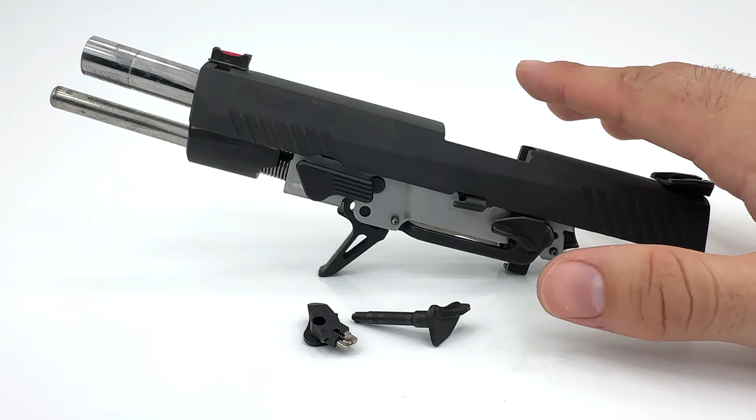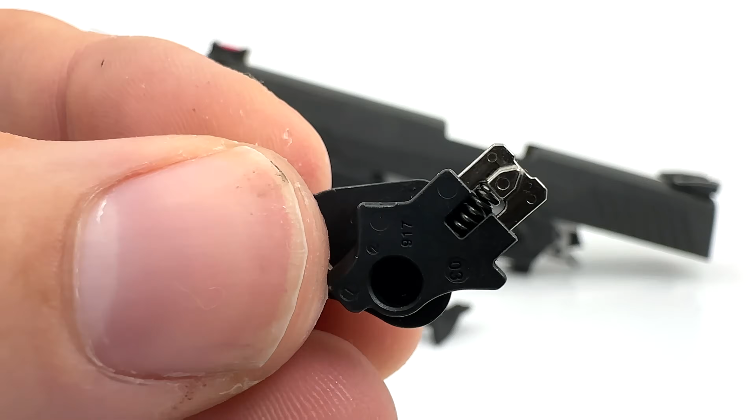I'm Edmund. This video is going to be a complete breakdown of how the P320 manual safety works. We'll discuss the parts involved, how those parts interact with the rest of the P320, as well as take a deeper look at what's actually preventing a discharge when the manual safety is in use. To make things easier to understand, I'll also use 3D modeling to illustrate some of the internal mechanics, and I'm also going to explore and explain a unique built-in feature of the P320 manual safety that isn't widely known or discussed, and it's not shown in any of Sig Sauer's marketing material. However, it's critical to how the P320 behaves if the manual safety is ever abused or otherwise forced into a failure state. Let's begin.

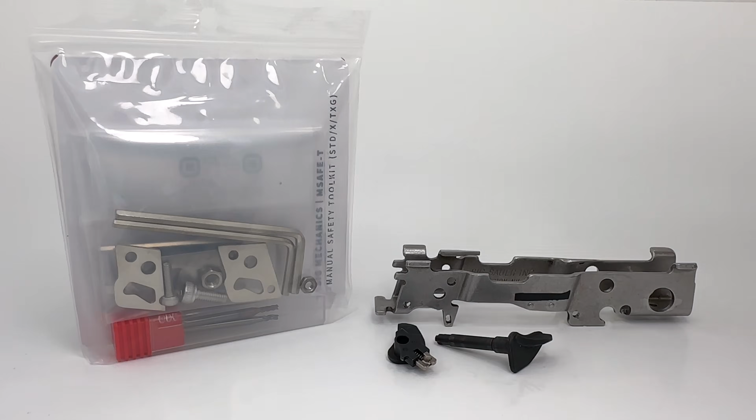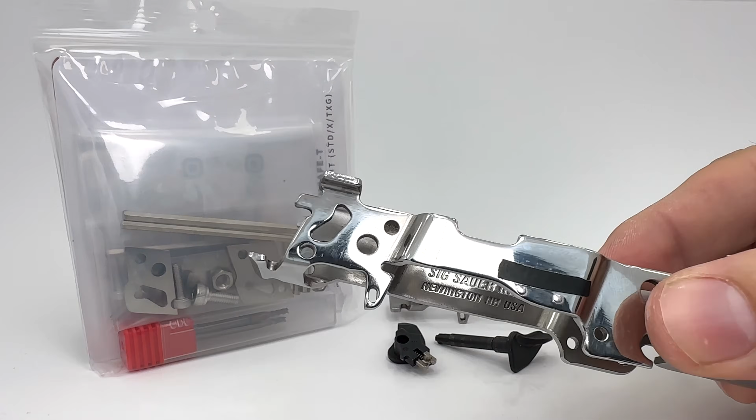Okay, so for those of you who subscribe to SIG Mechanics, you know that not too long ago I announced the MSAFE-T project for the P320. And for those of you who don't know what this is, it's a toolkit that lets you take any non-manual safety FCU and with the assistance of a few templated cuts, convert the FCU and the grip module into a manual safety model made to replicate the M17 or M18 models. And in doing so, it allows operators to modify the P320 further in order to meet their different operational preferences.

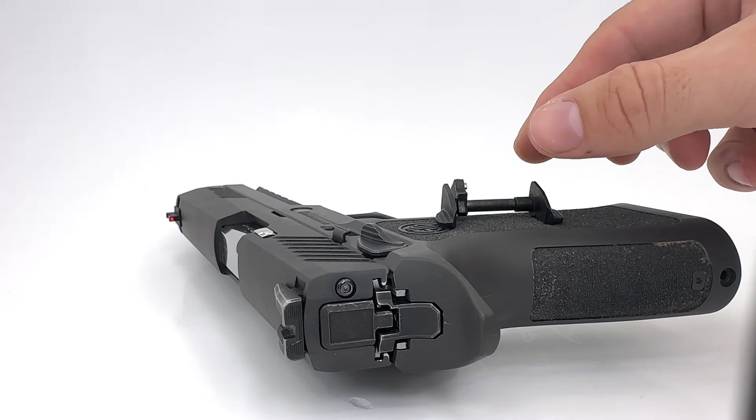Now, ever since I released that video, I had quite a few people ask me to make a video that shows you exactly how the P320 manual safety assembly works. And I think that has a lot to do with how the P320 manual safety doesn't operate to physically block the SEAR and instead prevents a trigger pull in a sort of indirect way.

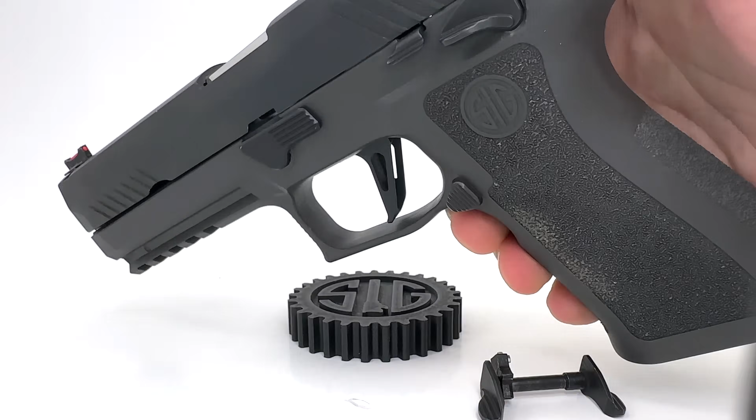And so here is the P320 fully built, and this one's using the X series grip, so yours might have the standard grip module. However, it's all the same thing. And as you know, to activate the safety, you lift the levers, and to deactivate, you drop them down, and that's the basic function. So let's open up the P320 and take a look at the FCU and see this function in normal operation.

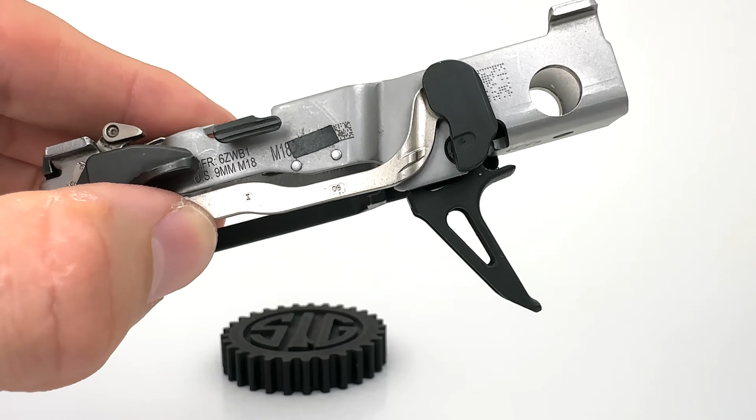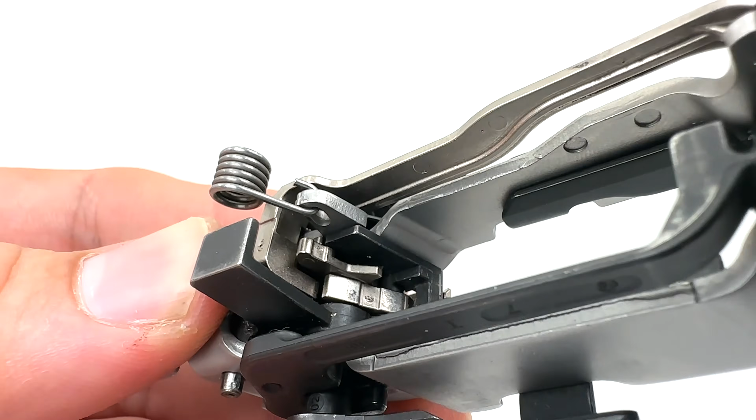Okay, so here is the FCU, and for those of you who are maybe newer to the P320 platform, the trigger is connected to the trigger bar. The trigger bar extends back and into the SEAR housing, and here you can see the trigger bar has a leg that extends back behind the SEAR. And now if I pull, the trigger bar will move forward until it engages the rear side of the SEAR, and as you continue to pull the trigger, the SEAR will continue to drop until the striker is released and the P320 can discharge.

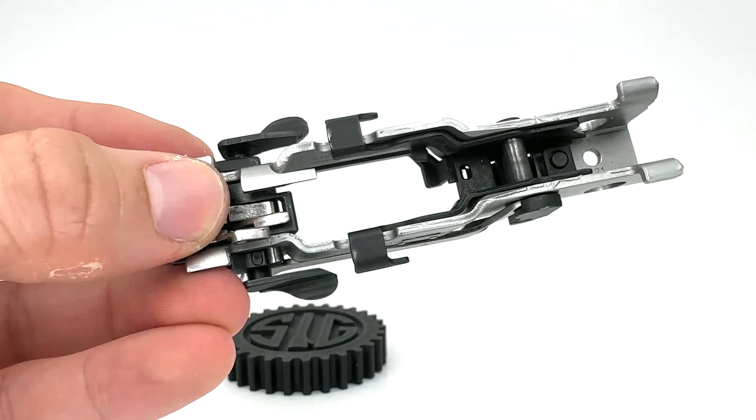Now, when you add a manual safety assembly, you're simply introducing 4 new components to the FCU. So here is a completely stripped FCU that only contains the components required to make the manual safety function. You might notice that even though the manual safety assembly is 4 components, this FCU has 5. That's because the SEAR pivot pin on the P320 actually plays 2 roles depending on if the manual safety is installed or not. I'll talk more about the SEAR pivot pin in a minute.

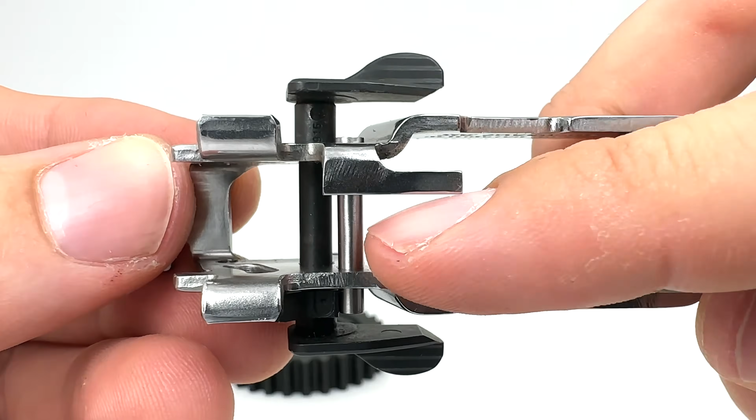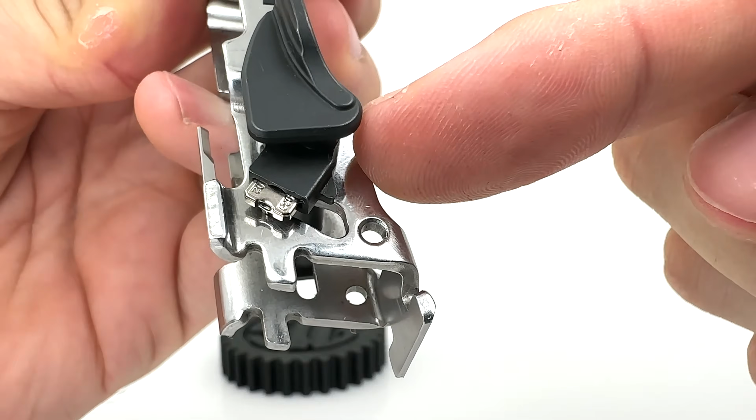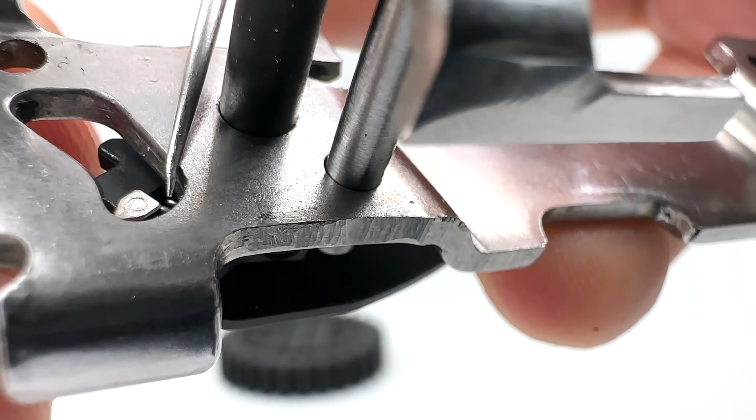But for now, when the FCU is stripped of all other parts, what's left is the left and right levers. As you can see, the right lever has a housing built into it, and in the housing is the detent, which is this small steel part right here. Behind this detent is a small spring that keeps the detent under constant spring tension. Now, if we flip the FCU and take a look at the detent from the inside, you can see the spring hiding behind the detent. But more importantly, you can also see that the detent has this chevron-shaped extrusion formed into it.

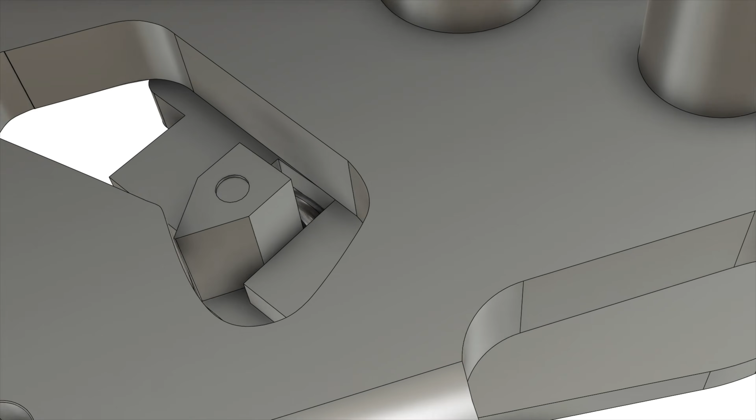And that pointed edge there is what rides along the surface of the manual safety cutout, which is this scalloped shape here, where the 2 rounded edges meet at this apex point. So when you activate or deactivate the manual safety levers, you're effectively just forcing the detent spring to compress as the chevron extrusion glides up towards the apex. And as you cross the threshold of the apex curve, the spring will rapidly decompress and drop the detent into the opposite side of the cutout.

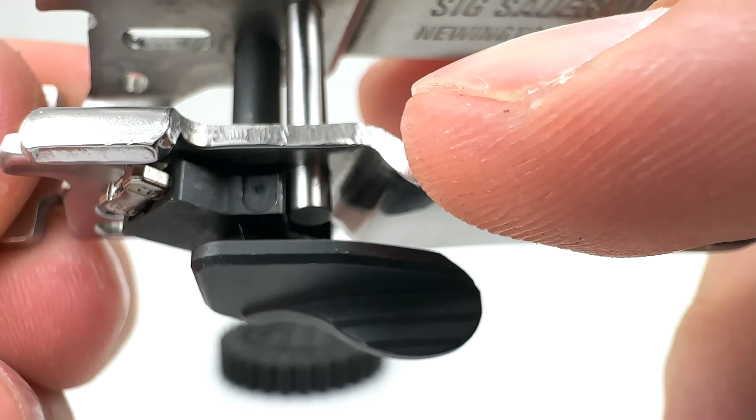Now, at that instant, the detent's spring will force the right lever housing to rotate quickly and impact the SEAR pivot pin. I mentioned the SEAR pivot pin earlier, and this pin does play a pretty critical role in the function of the manual safety, which I will talk about more later. But in the context of what happens when you activate and deactivate the safety levers, the right housing here has these 2 surfaces, which in conjunction with the SEAR pivot pin are there to create a hard stop as to how far the manual safety levers can rotate. And consequently, this is where you get that tactile feel or that click when you use the manual safety.

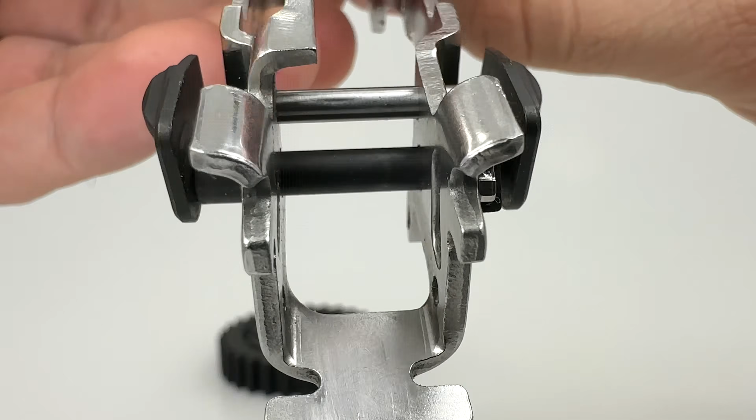Now, when you take a look at the FCU as a whole, at first glance, it seems that by removing all the other components off the FCU frame, there's really nothing about the manual safety assembly that actually blocks the SEAR directly, since as we established, the components of the assembly are all pretty much located on the right side lever.

If you didn't know what you're looking for, you'd really only see the left lever's cylinder passing through the FCU. I think this is what throws people off, because how is it that a simple cutout on the FCU frame and a solid plain cylinder that passes through the general area where the sear is supposed to be can actually prevent the sear from being pulled down?

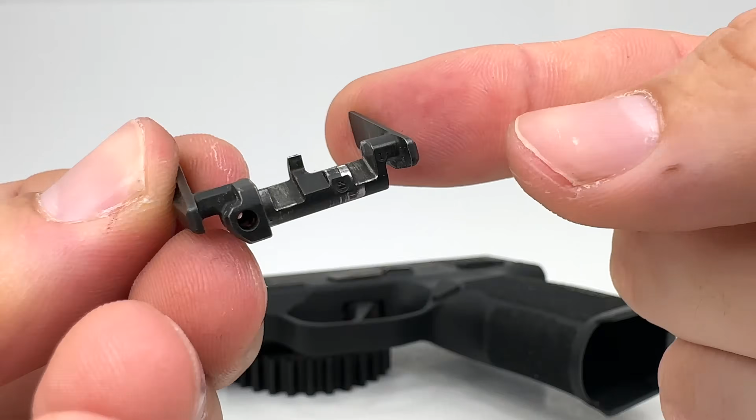If we look at the P365, which is widely regarded as having an extremely similar design and mechanical function as the P320, and take a closer look at the manual safety, the 365 manual safety has this small hook formed into the cylinder, which when installed on the 365 and then activated, will rotate to a position where it will physically stop the sear from dropping.

Unlike the 365, the P320 manual safety assembly uses some clever engineering that essentially does two things. First, it relocates the hook we saw midpoint on the 365 manual safety. Second, it changes the safety style from a post-sear engagement to a pre-sear engagement.

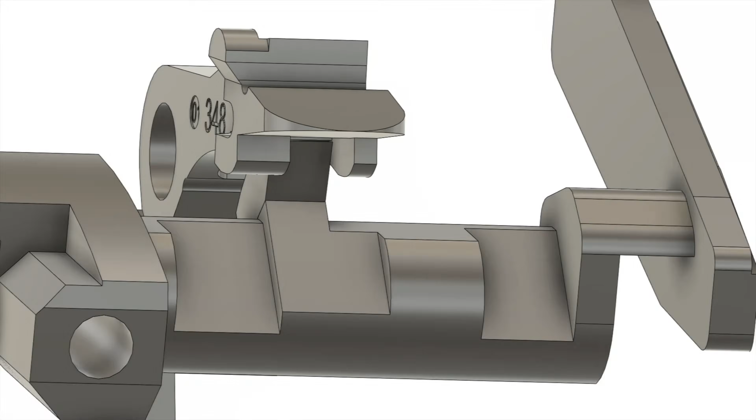What I mean by this is the P320 manual safety is not designed to stop the sear from dropping after it's been engaged like the 365, but instead it's made to stop the sear from actuation before engagement is ever even started. It does that by using this small post here formed into the right lever housing.

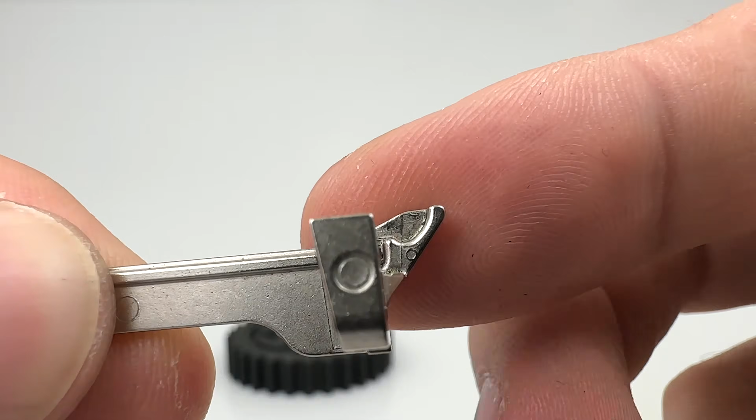In conjunction with this, the trigger bar itself, as you can see here, has a carved-out recessed area at the back which is engineered to catch the post during trigger travel. The mechanics look like this.

When the manual safety is disengaged, the post rests higher than the trigger bar, so if the operator pulls the trigger, it will pass by with no interruption.

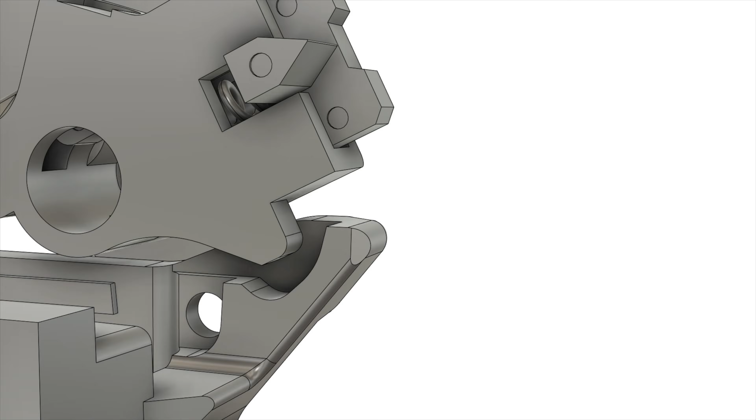However, when the manual safety is activated, the small post gets dropped down into the recessed pocket of the trigger bar. Then if the operator pulls the trigger, there will be a small amount of trigger travel as the trigger bar connects with the small post, at which point the trigger bar can no longer move rearward.

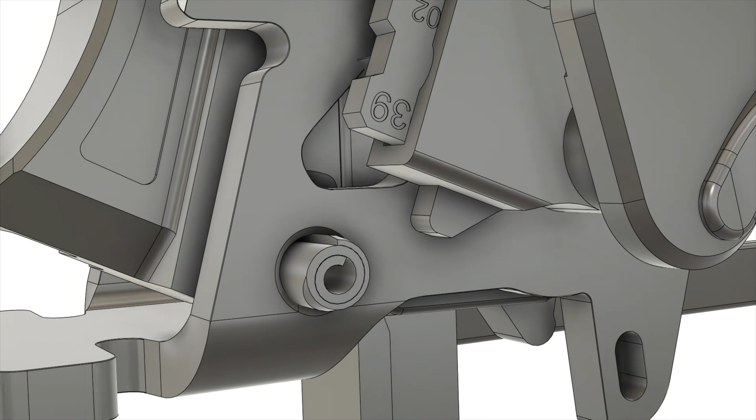Now, you might be asking yourself, just how much force or pressure can someone potentially put on the trigger so that they could theoretically chip or break the small post, causing the manual safety system to fail completely and let someone discharge with the manual safety turned on.

To show you what happens in that scenario, I'm going to put the P320 into a testing rig that will allow us to incrementally apply more and more pressure on the trigger while recording the resulting raw data.

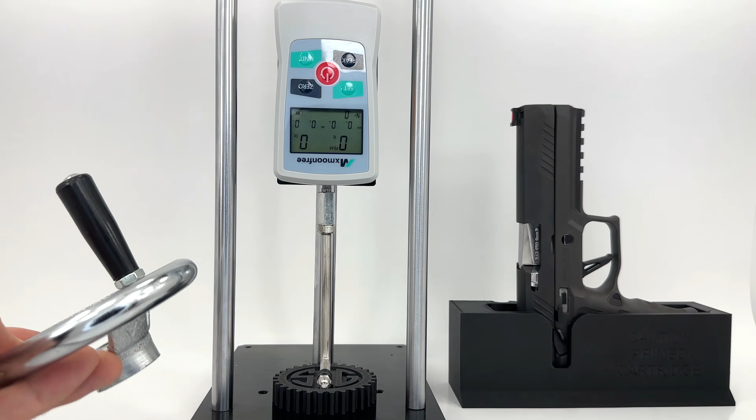Okay, so this is my testing setup. I have here a force gauge tester that's directly mounted to a manual testing stand, which will allow me to turn the crank at the top—which, by the way, I am replacing with a drill just to make the process faster.

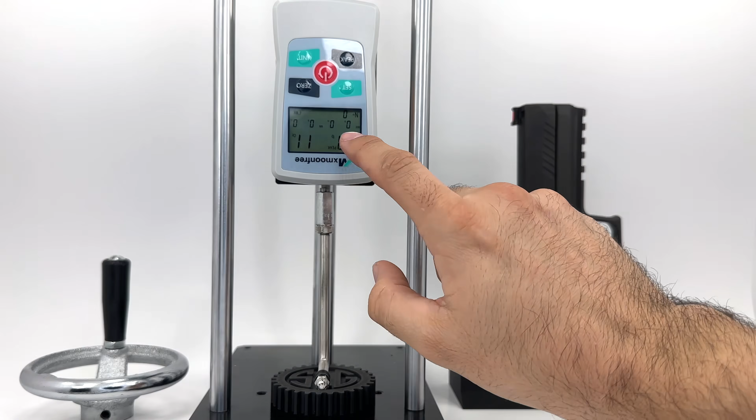As I incrementally turn the lead screw, we will apply downward force on the trigger. The force gauge will document how many pounds of pressure we are exerting onto the trigger, and it will display the peak force applied so we can see where we cap out once the assembly fails. This gauge is rated for about 500 newtons, or about 110 pounds, so either the trigger will malfunction or we will cap out the gauge's capability.

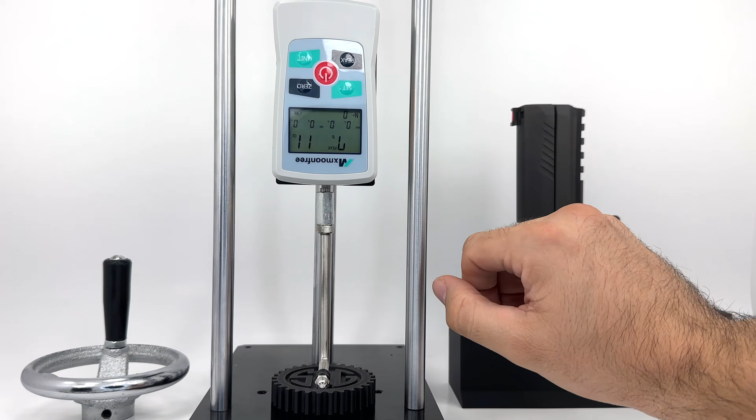To really capture what's going on inside the P320, I'm going to load it with a primed cartridge so we can document if the striker is ever released. I'm also placing the P320 into a special holder I 3D printed out of carbon fiber, which is there to hold the P320 upright.

I'm also going to add a few heavy-duty zip ties to the testing rig, because at a certain point the trigger will be forced so far back that any additional force will want to dissipate by pushing or pulling the P320 forwards or backwards. This is here to keep the test going as long as we can, so we can capture as much data as possible. Okay, let's begin.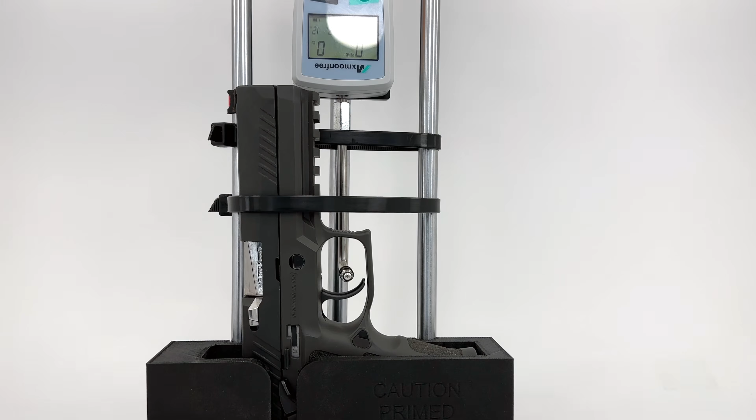Everything is set up and ready to test, and you may have noticed that I swapped back to the original curved trigger here, and that's because I am using the M18 FCU, and this is the curved trigger that is stock with that model. I'm also purposefully swapping it because I want to explain something to subscribers about trigger geometries and how they affect a trigger pull. What you are about to see applies to all trigger models. It's just easier for me to present this using this particular trigger model, but I'll give you more details afterwards. Okay, let's start the test.

All right, so I'm just going to pause here. Right there, you did see the trigger move, and for all intents and purposes, that was a complete trigger pull. Now, I will note that the primer has not gone off, and we will verify that once I pull the primed cartridge out. But for now, we will just take note of the maximum force we reached at this time, and I will continue to keep applying force onto the trigger and see if we can maybe cap out the force gauge's rated maximum of 110 pounds.

Okay, so we should be nearing the 110 pounds max rating. So let's just keep going. There it is. Now I don't see a silence button on the gauge, so I will lower the volume post-production, and hopefully that will be a little less annoying, because now that we're here, we might as well just keep going to see what happens if we put more pressure on the trigger until we maybe break the tester or the P320. So let's keep going.

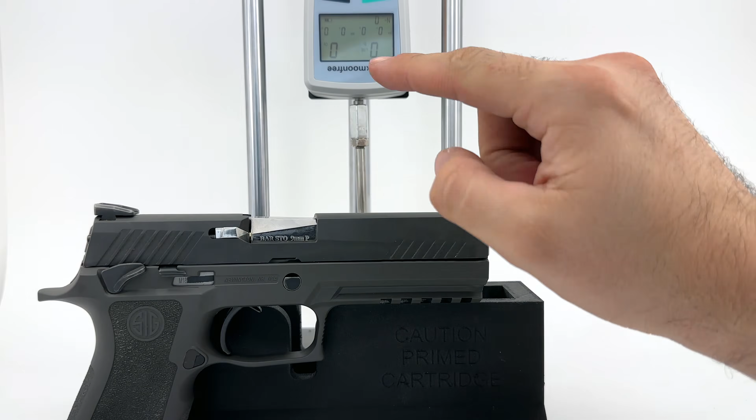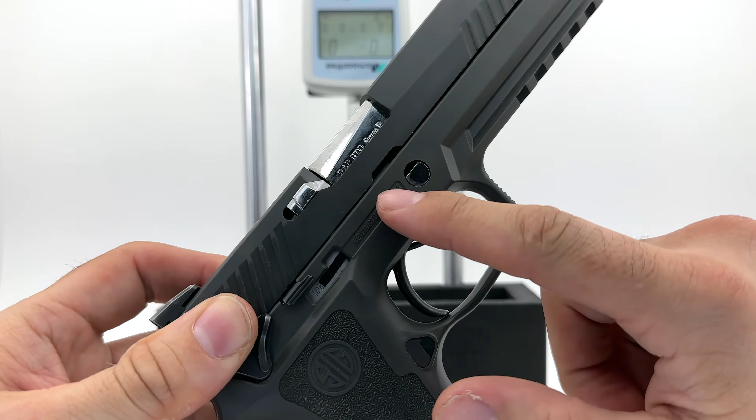So the tester is actually okay, but the P320 did suffer some irreparable damage. As you can see, the trigger is no longer springing back to its start position, but also the trigger has lost all support. So it's just sitting loose inside the FCU, meaning that the trigger bar must be completely and irreparably broken. So let's open this up here.

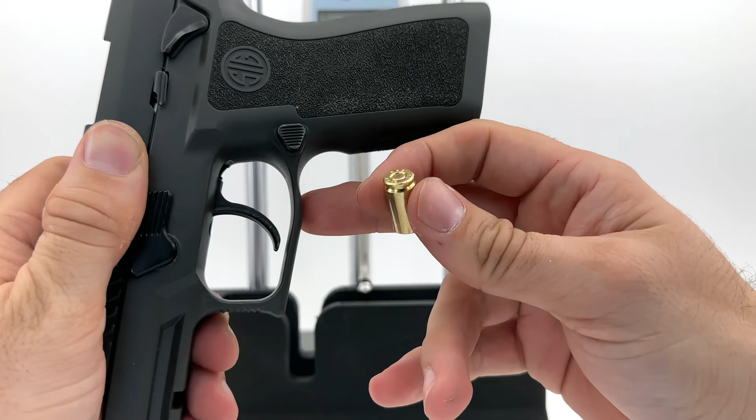And here is the primed cartridge, which as you can see here, the primer has not marked it, meaning that through both incidents, first when we made the trigger fully pulled back, and second when we abused the over travel to the point of failure here of the trigger bar, the striker would not have made the P320 discharge.

Now let's pull out the FCU here. And there you have it. The trigger bar is literally split into two pieces.

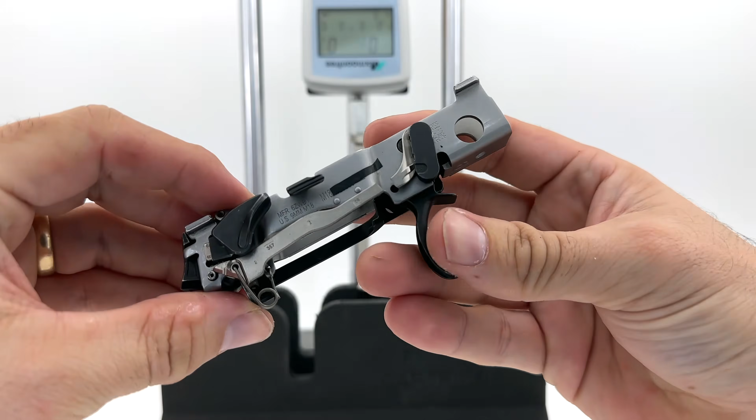Now, this actually breaks the flow of this video a bit because I did not expect this to happen, but I felt it was important to leave this in, so you can see the types of things that happen when you abuse the trigger, so you won't have to sacrifice your own parts. But the trigger bar splitting is actually not the focus of this video, because I actually want to talk to you about what happened during the first incident where the trigger fully pulled back at about the 20-pound mark, but the primer still didn't go off.

So in order to discuss that properly, I am going to get a new trigger bar installed here, and I'll spare you the details of having to watch all of that, but I'll skip forward to where I can rerun the test in order to replicate the trigger movement that we saw earlier, and then I'm going to explain what's going on inside the P320 and why it won't go off when the trigger was abused like that. Okay, so here we go.

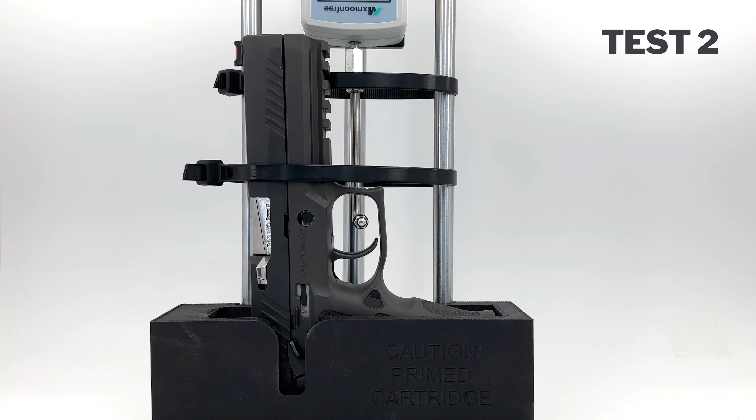And there we have the trigger fully pulled again due to the trigger being abused. So I'll slowly release the testing gauge so we can see what happens when we release the pressure. And you can see the trigger clicking back to the start position. So let's pull it out of the testing rig and talk a bit about what happened here.

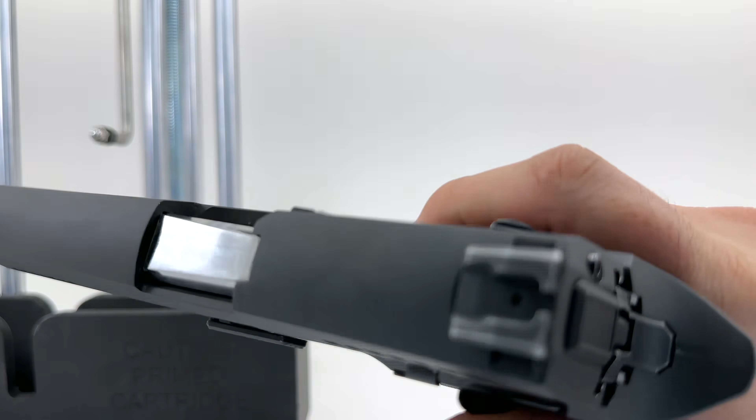Now, before I pull the primed cartridge, let's carefully test the manual safety levers, and they do seem to be moving freely, and it doesn't feel like anything's out of spec. So let's just remove the primed cartridge now, and I'll put that to the side for a second, and we will do a quick function check here.

So with the safety on, no trigger pull, and the P320 is rendered safe, and with the safety off, the striker releases, and we can reset the trigger. And as you can see, it's back to normal function.

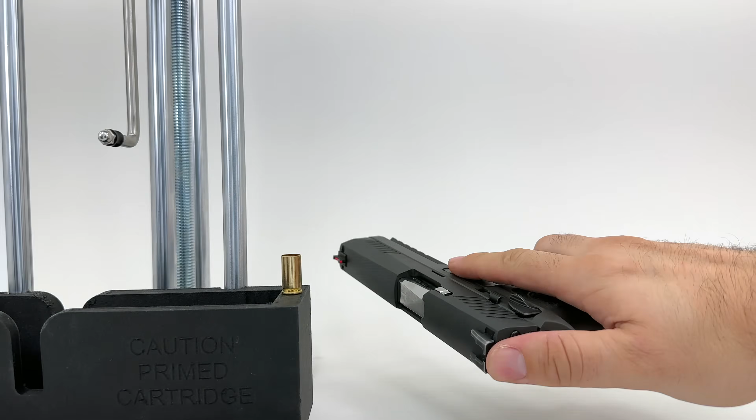Now, let's take a look at this primed cartridge. And here you can see that there are no striker markings on the primer. So although we did document a complete trigger pull, the P320 is not actually discharging.

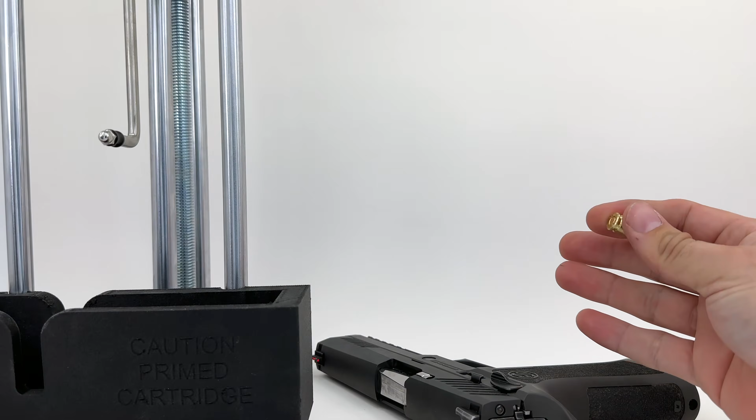This is due to an additional built-in safety feature of the P320 manual safety that, oddly, I haven't heard anyone talk about before, and it's not mentioned on SIG's marketing material, but it is pretty critical. So let's take a look at what happened here.

On the P320, the small post here was engineered in a way that will not just stop the trigger bar from moving forward, but also account for how to deal with operator abuse. I think this is a pretty great feature, because beyond the obvious, simple mechanics like this that have a significant impact on function is why I really like this platform.

If you think about it, there's no way this small pin here would ever be able to do all the heavy lifting in a situation where someone is either accidentally or negligently abusing the trigger. So when someone is exerting great force on the trigger, at a certain point, the connection between the post and the trigger bar's recessed slot will slip.

And so what happens at this point is it behaves like a trigger bar disconnector. The sloped curve of the trigger bar will slip onto the rigid position of the post, and the manual safety lever will then force the trigger bar down. When this happens, the trigger bar is dropped underneath the sear's leg.

From that point on, no matter how much energy or force you put on the trigger, there's no way the trigger bar will be able to walk itself back behind the sear until the operator releases the trigger, and the manual safety resets back to its normal state. So long as the manual safety is activated, you will not be able to accidentally pull the trigger, and even if you did, the P320 will remain in a safe state.

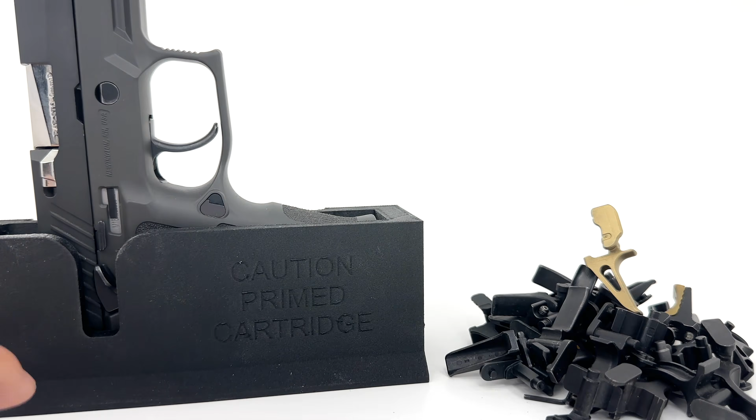Before I move on, I'm going to quickly explain why I thought it was important to use the curved trigger during that test, beyond the reasoning that the curved trigger is the stock M17 and M18 trigger model. The main reason is that I wanted to easily show you the additional safety feature we saw, where pressing the trigger hard enough caused the trigger bar to go into disconnect mode.

I said easily because even though that feature occurs with every trigger model, how much force you need to cause it is dependent on the geometry of the individual trigger. With some triggers, it will require a force that's much higher than others in order to replicate that action.

The skeletonized trigger here is a good example of this, where with this trigger it will take substantially more force to cause the trigger bar to disconnect from the path of the sear. But like I said, with enough force, it will happen.

For those curious as to why it's harder with some triggers and easier on others, it's basically down to how the trigger changes the direction of travel that the trigger bar takes during a trigger pull, which I can get into on another video. But for the sake of keeping this one a reasonable length, the connecting pin here on each trigger will define the start and end angle that the trigger bar will take as you pull the trigger.

Just to be clear, the fact that a trigger will take more or less force to activate that disconnect feature doesn't define if the P320 is inherently safer because of that trigger. As a matter of fact, having a trigger that disengages sooner probably gives the P320 internal parts more life, since you're not stressing the trigger bar as much as one that does not relieve the violent pressure or force, which theoretically might avoid situations like this one here.

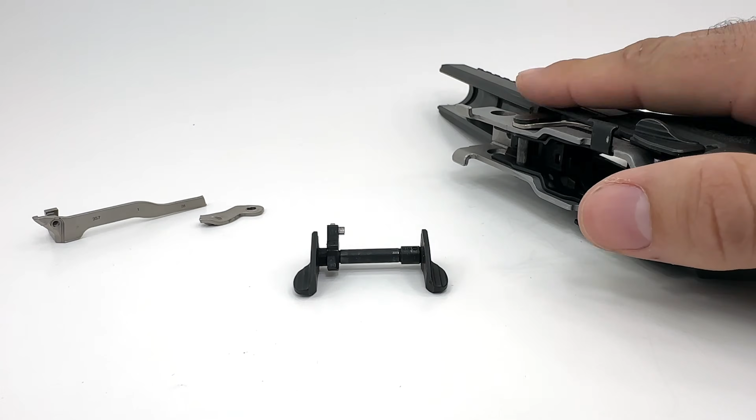All right, so with that clarified, let's move on. Now we've gone over the basic mechanics of the P320 manual safety assembly, and we've seen and tested the limitations and somewhat additional functions of that safety.

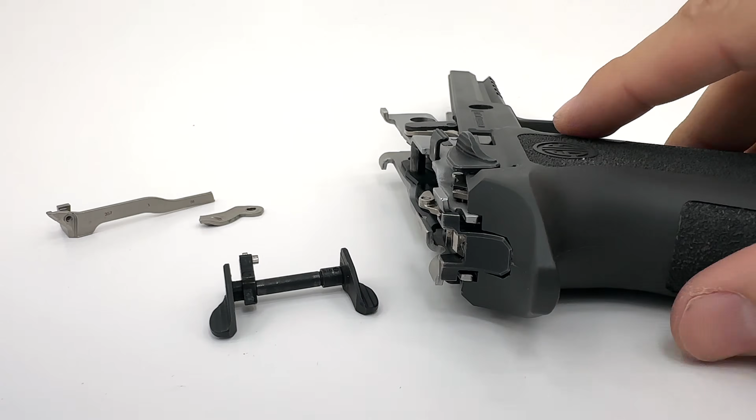Now I want to go deeper and provide subscribers with details about the engineering of the manual safety, because it's very interesting how SIG was able to take a complex mechanical system and simplify that into what you see today. With this design, without having to re-engineer their other components, you're now able to introduce 4 parts, and you've changed the function of an entire platform.

Not just that, but also in understanding how the system works, you will have made it much easier on yourself to do things like maintain and service your P320, as well as swap out parts if needed. So let's start with how the manual safety assembly is even able to work in the first place, because for all the parts of the manual safety to come together and do what they're supposed to do, the parts had to be engineered in a way that will let you easily purchase and install those parts yourself if the P320 didn't originally come with them.

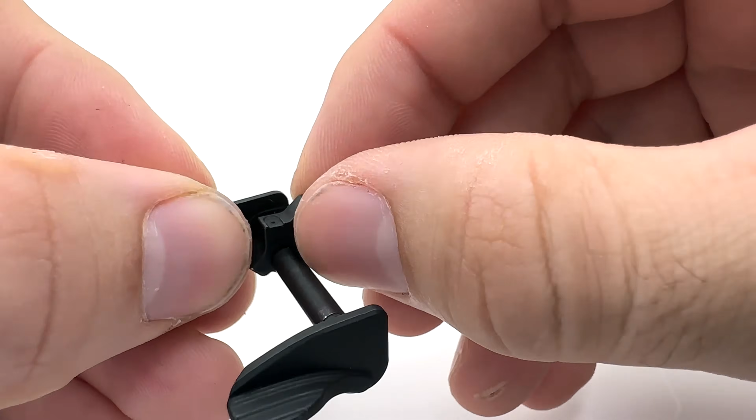I want to start with a very critical component that at first glance looks pretty basic, but in reality is the whole reason the manual safety as you see it today is even physically possible. Let's talk about the manual safety detent. As you know, the detent is this tiny part that has a chevron extrusion formed onto it, which when it meets the FCU frame, rides within the cutout and allows you to engage and disengage the safety. This part is also the reason why you only need to slip the left lever through the FCU and then connect the right lever to it. It's really the part that keeps the entire manual safety mechanically held together.

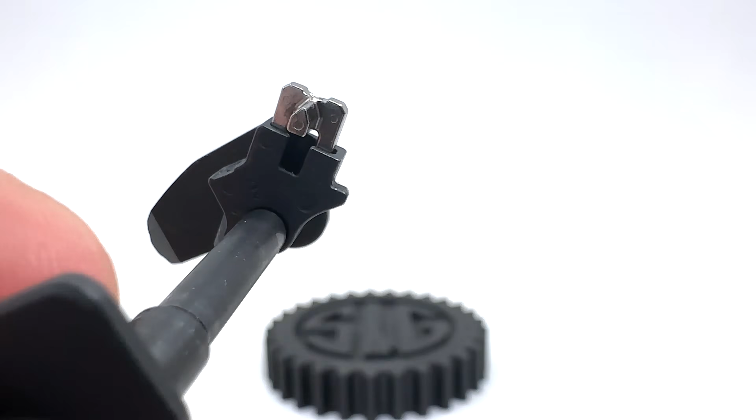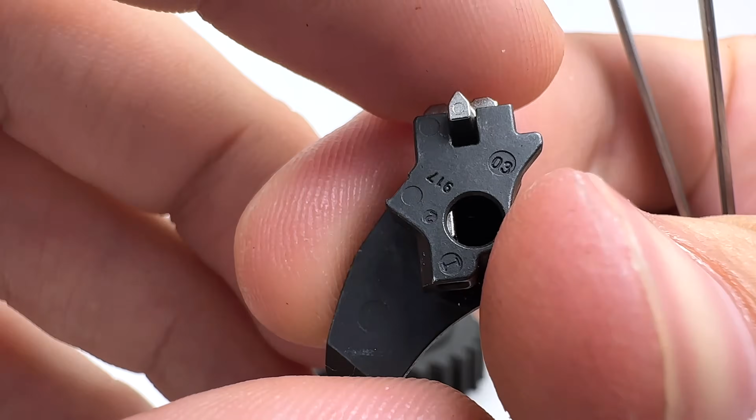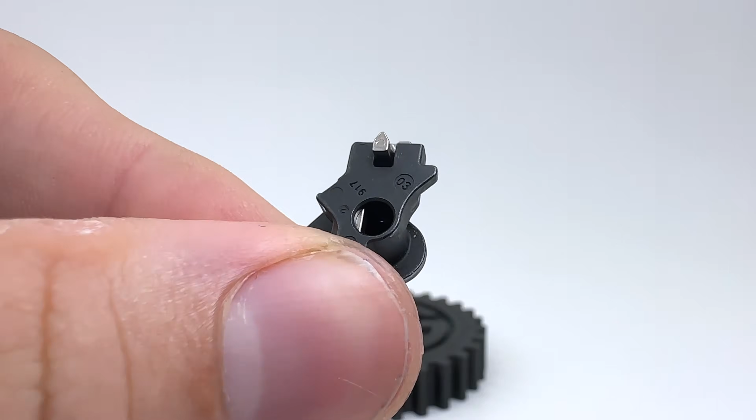The detent is designed with one leg longer than the other, and this helps for orientation because the leg only drops in one way. More importantly, when the detent is installed correctly and it comes time to interlock the left and right levers, the detent is designed so that the longer leg, when compressed, makes its way into a cavity on the right lever housing. This creates a wedge that retains the left lever from coming apart from the right lever. The length of this leg is also critical because it works in conjunction with the SEAR pivot pin so that mechanical locking occurs the moment you slightly rotate the levers, giving the SEAR pivot pin the gap it needs to be pushed all the way through the FCU.

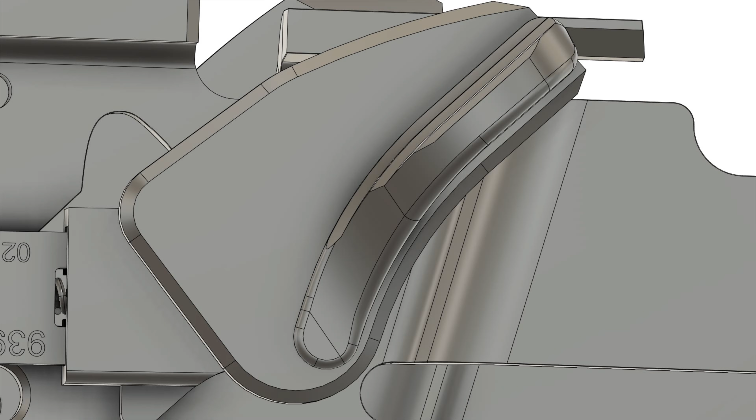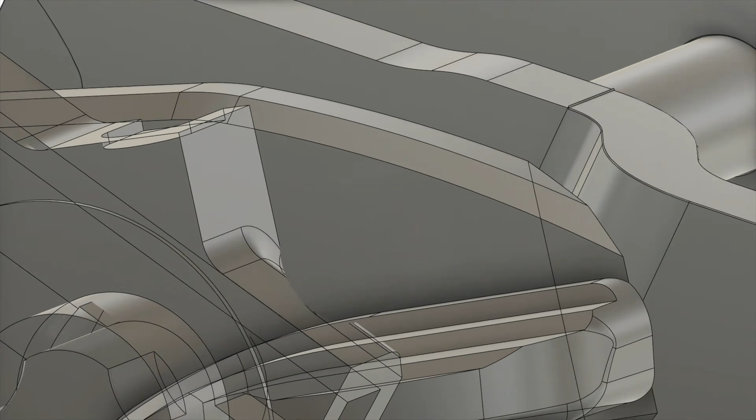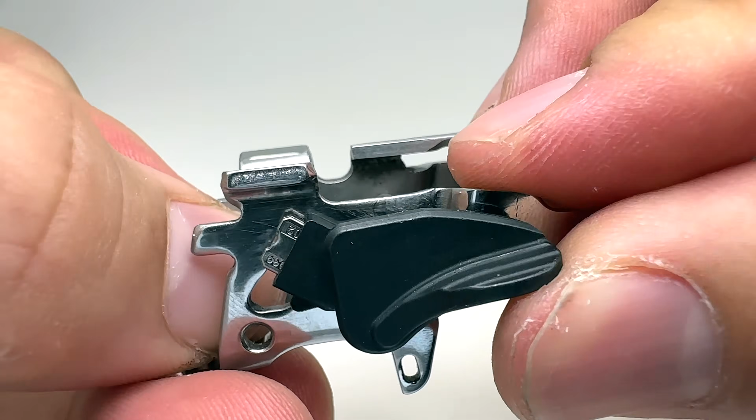This relationship between the detent and the SEAR pivot pin goes even further, because the entire reason the manual safety doesn't just fall apart while you're using it is due to the fact that the SEAR pivot pin forces you to slightly rotate those levers, which puts the detent under constant spring tension. But the levers cannot spring back to an uncompressed state because the SEAR pivot pin is now slotted between the two surfaces of the housing we talked about earlier. This effectively creates a stop point on the manual safety lever that prevents the levers from returning back to the point where the detent's longer leg can slip out of the right lever's housing, mechanically releasing the two parts from one another.

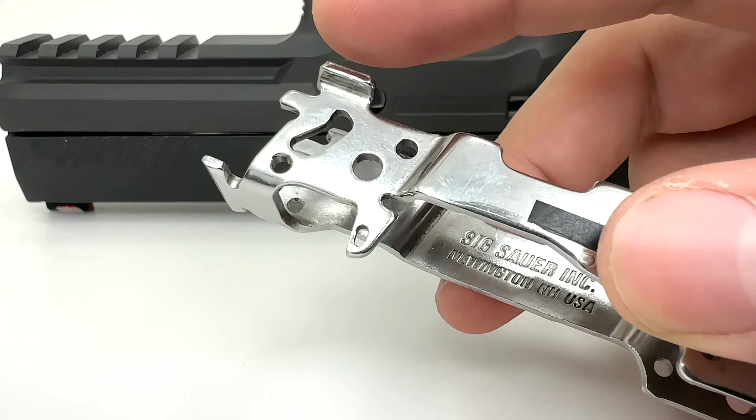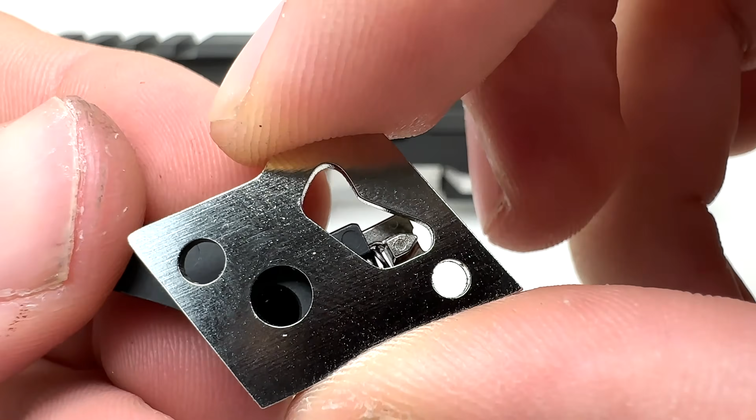Beyond how it works to activate and deactivate safety, and in relation to the detent we just spoke about, I need to talk about the shape of the FCU's manual safety cutout and what role it plays in the installation and disassembly of the P320 manual safety. You'll notice the FCU cutout is not a perfectly symmetrical design; the bottom half is slightly more elongated, and this bottom oblong shape allows the installer some clearance so that as you drop the detent in place, it's not instantly compressing the detent spring and locking the left and right levers together instantly. The cutout gives you a starting point so you can get the detent's chevron fully seated into the FCU frame in preparation for that final slight rotation that mechanically secures the assembly in place, and vice versa for disassembly.

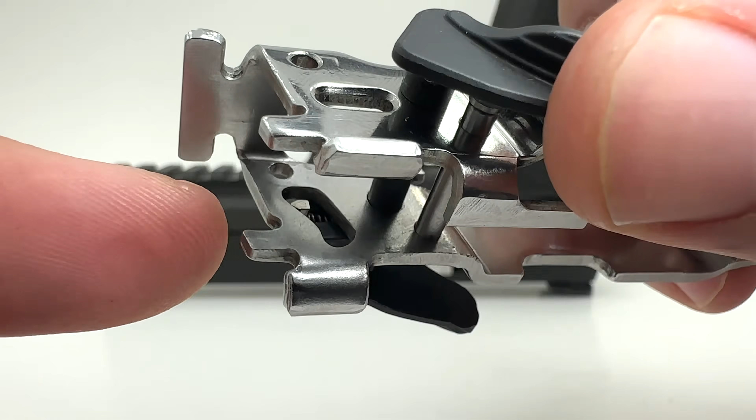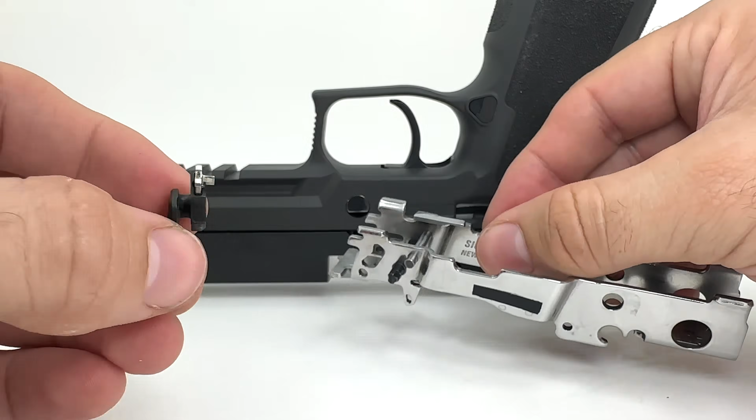When it comes time to disassemble the manual safety, you can use the cutout to carefully decompress the detent spring by guiding the detent along the cutout surface, which is a feature you don't generally appreciate until you have the small detent, or even worse, the even smaller detent spring fly across your workbench. With that final bit of detail, you now have a full and complete understanding of the P320 manual safety and how it works.